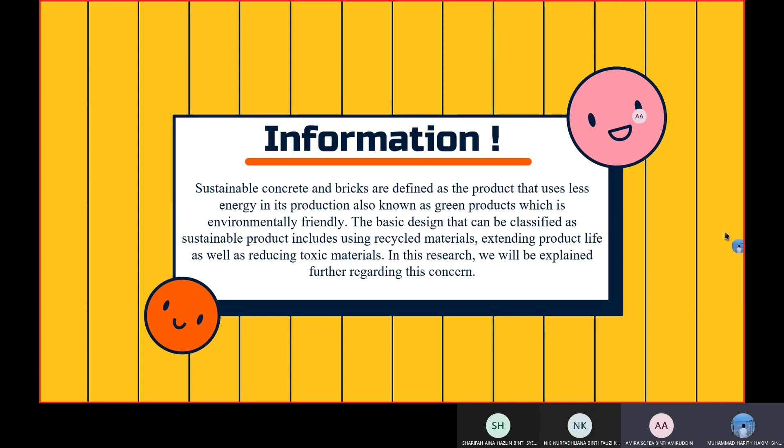The basic design that can be classified as sustainable products includes using recycled materials, extending product life, as well as reducing toxic materials. In this research, we will explain further regarding this concern.

In the journal Concrete Durable but also Sustainable by Professor Dr. Ir. Charles F. Hendriks, the topic being questioned by him is the sustainability of durable concrete from recycled aggregates. He mentioned that even though the process of concrete leads to unlimited quality of sustainability, it could just be a presumption. The goal of this study is that important aspects such as environmental loading and health aspect should be taken for a closer look.

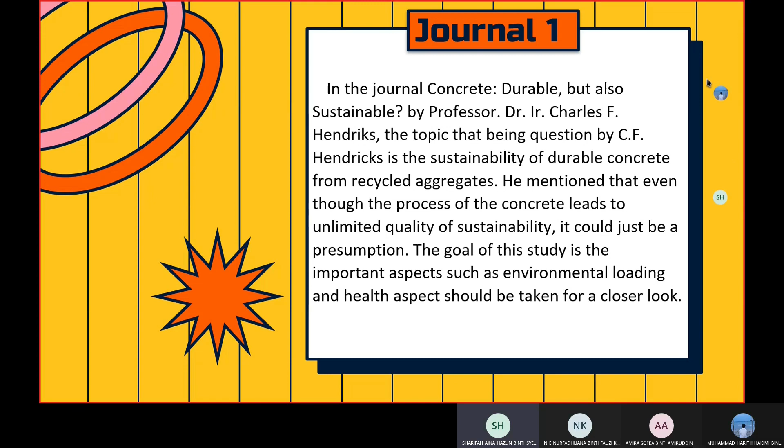Second, the experiment from the journal Properties of concrete with recycled aggregates, influence of properties of the aggregates and their interpretation by M Barra was carried out to evaluate the physical and mechanical characteristics of coarse recycled aggregate created from actual conventional concrete. The paste-coarse recycled aggregate interphase was analyzed with an impact on the characteristic of fresh concrete. The impact of various brick content was also investigated in the recycled concrete.

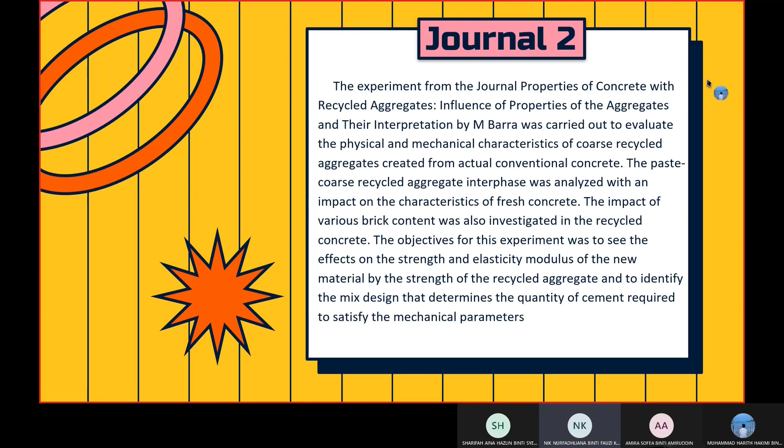The objective for the experiment was to see the effect on the strength and elasticity modulus of the new material by the strength of the recycled aggregate and to identify the mix design that determined the quantity of cement required to satisfy the mechanical parameters.

The third article is in regards of concrete with recycled concrete aggregate that was conducted by R. Dillman from University of Essen, Germany. The tests were carried out to assess the effect of employing recycled aggregates from mature concrete of varying strength on the characteristic of fresh concrete, as well as the effect of adding crushed concrete sand. This written article demonstrated that the strength of mature concrete has no influence on the strength of recycled aggregates or the characteristics of fresh and hardened concrete.

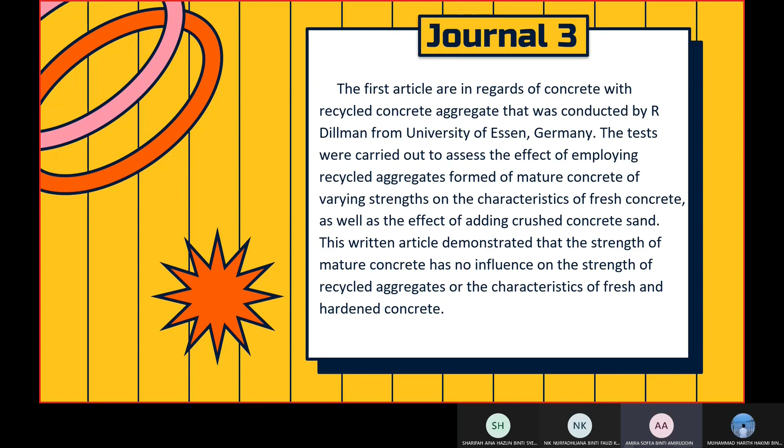So for the fourth journal, in the journal Recycled Concrete Aggregate, an alternative concept by Dr. Adam G. Johnston, Mr. Andrew R. Dawson, and Dr. Gareth J. Brown state that the manufacturing of the aggregate for concrete product is the most effective and environmentally friendly use of the concrete waste. However, there are issues with preserving the consistency and the quality of crushed concrete waste because the crushed concrete waste instead of fresh concrete results in product with reduced strength, slump, and workability.

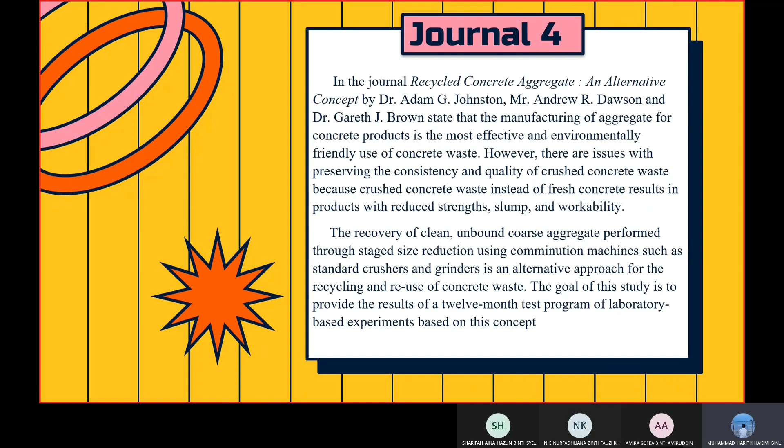The recovery of clean unbound coarse aggregate performed through staged size reduction using comminution machines such as standard crushers and grinders is an alternative approach for the recycling and reuse of concrete waste. The goal of the study is to provide the result of a 12-month test program of laboratory-based experiment based on this concept. So the next segment is the methodology.

The methodology used in this journal is the researcher conducted a research based on the comparison between Dutch CUR organization, RILEM and CEN TC 154 aggregates on the use of recycled aggregates in producing cement. The pros of using this method is, it is much easier for the researcher because it will only involve a lot of reading without having to do a physical research. But the cons is that there will be no test conducted to prove whether the data provided in the earlier research is still eligible to use in the current situation.

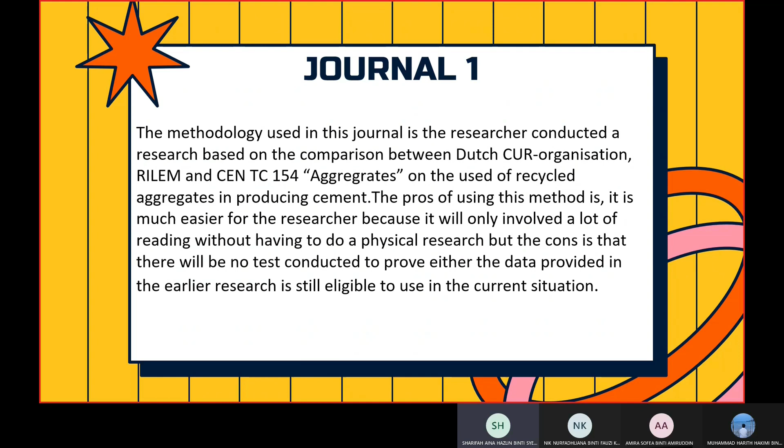Next. The methodology for this journal is the researcher conducted the research based on the influence of recycled aggregates on the properties of new concrete. The coarse aggregate was added to a paste or mortar and then observed, in which the aggregate will be initially mixed with water in certain time.

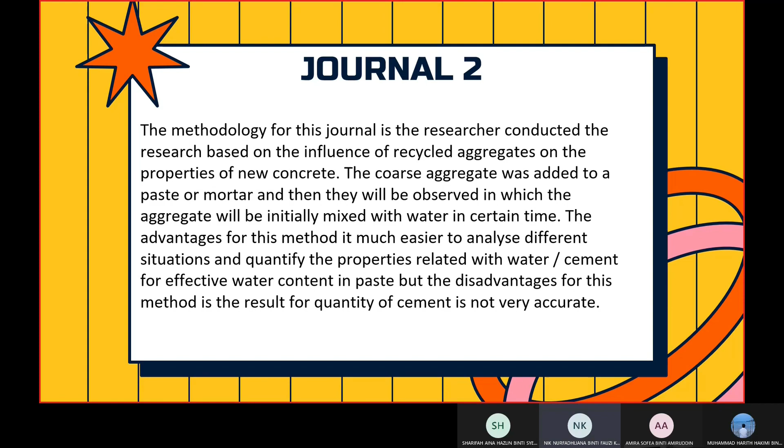The advantage for this method is it is much easier to analyze different situations and quantify the properties related with water, cement for effective water content in paste. But the disadvantage for this method is the result for quantity of cement is not very accurate.

For this purpose, two crushed and sieved aggregates made of concretes with a compressive strength in the lower 20 Newton per millimeter squared and upper 55 Newton per millimeter squared ranges were used, as well as crushed and sieved aggregate, which will be referred to as the practice mix. The practice mix was taken from the concrete stockpile of a recycling site. Firstly, the aggregates tests were done to ascertain the characteristics of the three aggregates supplied.

Next, concretes were made. In an oven, the aggregates were dried. The recycled aggregates were pre-mixed 30 minutes before the concrete production based on the quantity of water absorbed in 30 minutes and the amount of individual grading, so that the recycled aggregates were saturated on the surface yet dry. Following that, 110 dm cubed batches of concrete were made. Following the addition of water, the concrete mixed for 60 seconds and the consistency was assessed.

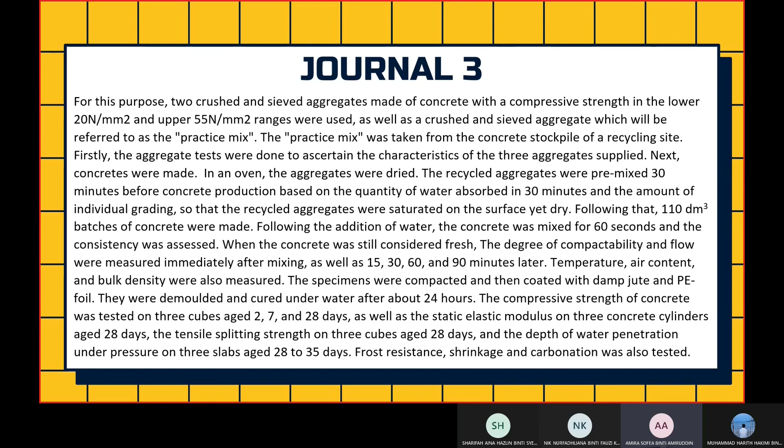The compressive strength of concrete was tested on 3 cubes aged 2, 7, and 28 days, as well as the static elastic modulus on 3 concrete cylinders aged 28 days, the tensile splitting strength on 3 cubes aged 28 days, and the depth of water penetration under pressure on 3 slabs aged 28 to 35 days. Frost resistance, shrinkage, and carbonation were also tested.

So in the fourth journal, the assessment and observation of the volume and rate of aggregate released by traditional crushing and dry grinding were part of the investigation into the aggregate liberation process. Complete specimens were crushed in a double toggle Sturtevant jaw crusher and a Sturtevant smooth rolls crusher as a part of the crushing experiment. The liberated aggregate in each size fraction was weighed to determine the particle size distribution of the crushed product using round-aperture test sieves. Visual classification and hand sorting were used to determine the amount of released aggregate.

All crushed product size fractions bigger than 6.7 mm were recombined in the dry milling trials, and a representative sample was placed in a rotating mill under settings that promote abrasion of the sand binder component from the aggregate particles. The liberation characteristics were determined in the way stated above.

Based on the current differences in the mill operating factors such as charge weight, mill speed, and residence duration, the need for dry product for the preparation of specimens for the binder rehydration investigation is to restrict the use of the wet milling method. The pro of the method is the concrete aggregate will achieve its pure composition in order to ensure the highest quality.

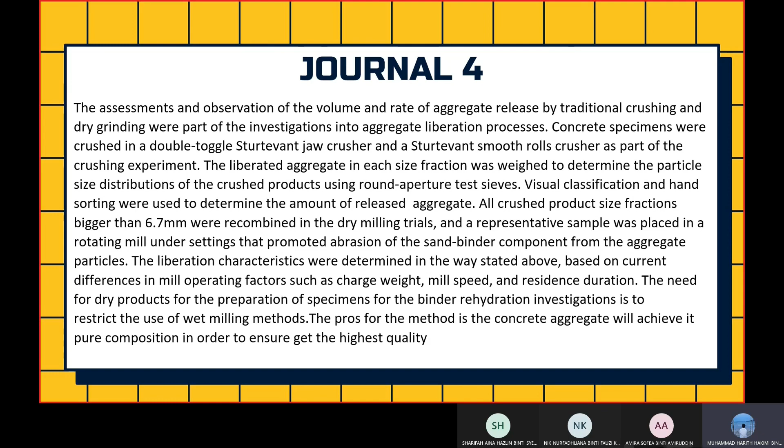So the next segment is the findings. The first finding from this journal is the type of recycled aggregates, which is one of the most important criteria on recycled aggregates. There are 3 important types, which are known as Type 1, Type 2, and Type 3. Type 1 originates primarily from masonry rubble. Type 2 originates from concrete rubble. Meanwhile, Type 3 consists of a blend of maximum 20% of recycled aggregates and minimum 80% of natural aggregates. The requirements for each type are summarized in Table 1.

From this table, we can clearly see that the requirement is totally different for recycled aggregates to be classified according to its type. For example, the table shows that the minimum requirement for dry particle density for Type 1 is only 1500 kg per meter cube, but 2000 kg per meter cube and 2400 kg per meter cube for Type 2 and Type 3 respectively. The maximum content for Type 1 aggregates is intended to be 10%, but an example of 50% masonry and 50% concrete mixture may be used for blending natural aggregate. These categories may equate to an increased level of performance.

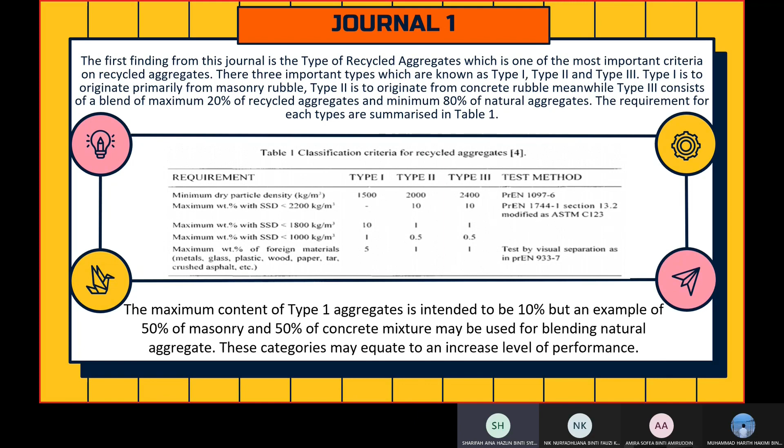The properties of concrete with recycled aggregates may differ from concrete with only natural aggregates. RILEM had concluded the property variations within concrete with up to 20% of recycled aggregates or up to 10% of recycled masonry aggregates are negligible. The second finding will be the properties of concrete with recycled aggregates based on the data provided by the Dutch CUR organization, RILEM and CEN TC 154 aggregates. The first property is water demand.

Recycled concrete aggregates, notably recycled masonry aggregate, typically have a higher porosity than natural aggregates. Because of this, concrete with recycled aggregates absorbs a higher amount of moisture than ordinary concrete. However, by pre-wetting the aggregate or by partly saturating the aggregate in the concrete mixture prior to the addition of cement, a concrete will result with properties similar to those of an ordinary concrete mix.

The next property is workability. A high level of aggregate replacement causes less workability. Adding water may increase the workability, but it is strictly advised against because of the adverse influence on the strength and durability of concrete. Basically, addition of superplasticizer will be more sufficient. Alternatively, the amount of water and cement can also be increased simultaneously in order to keep the water-cement ratio at a constant value.

The third property is shrinkage, creep, and modulus of elasticity. Due to the moisture absorption in recycled masonry aggregates, it may display lower shrinkage in the initial stages of hydration. In case of total replacement with recycled masonry, shrinkage may be about 40% higher, which will increase the creep by 15 to 40% and decrease the modulus of elasticity by 10 to 30%.

The next property is compressive and tensile strength. A full replacement lowers the compressive strength by 20%, but if the fraction is larger than 4 mm, the decrease may be limited to only 10%. The tensile strength is marginally less compared to concrete with natural aggregates. However, recycled masonry causes the bending tensile strength to be about 50 to 60% of ordinary concrete.

Next, frost resistance. If there is no extremely high moisture load, concrete with recycled aggregates can be taken as frost-proof. In case of high moisture load, the application of recycled masonry should be avoided for outdoor application. Water and chloride that can penetrate deeper in concrete with such aggregates can cause frost damage.

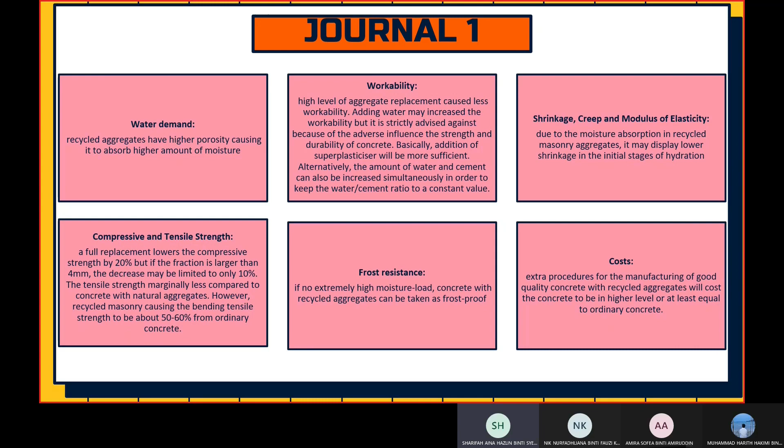And the last property discussed is the cost. The extra procedure for manufacturing good quality concrete with recycled aggregates will cause the cost to be higher or at least equal to ordinary concrete. The third finding for this journal is whether recycling is possible at material level or construction element level. It is explained that the possibilities for recycling aggregates are considered at material level.

In the life cycle assessment, concrete with recycled concrete aggregates consumes higher energy for manufacturing, especially for the crushing and the additional cleaning operation. In case of a higher percentage of recycled aggregates, the cement requirement will increase to compensate for the potential loss of strength. More water or additives should be added, coinciding with the increase of the raw materials.

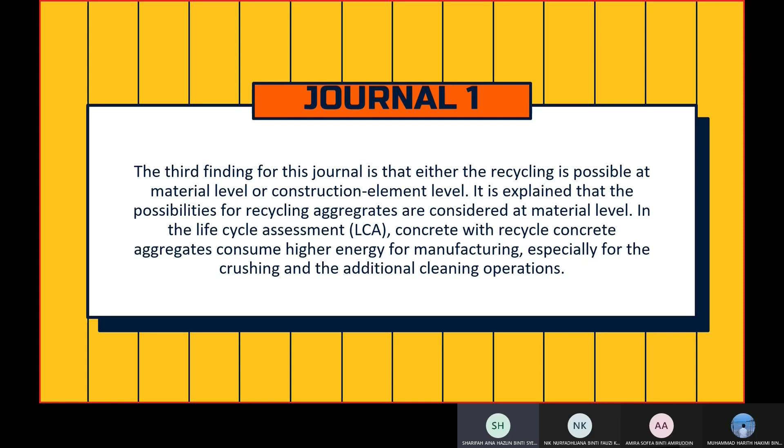In the production of recycled aggregates, there is a larger waste residue than natural aggregates. The environmental advantage of the recycling process at material level is only limited to the landscape deterioration and prevention of landfilling demolition waste.

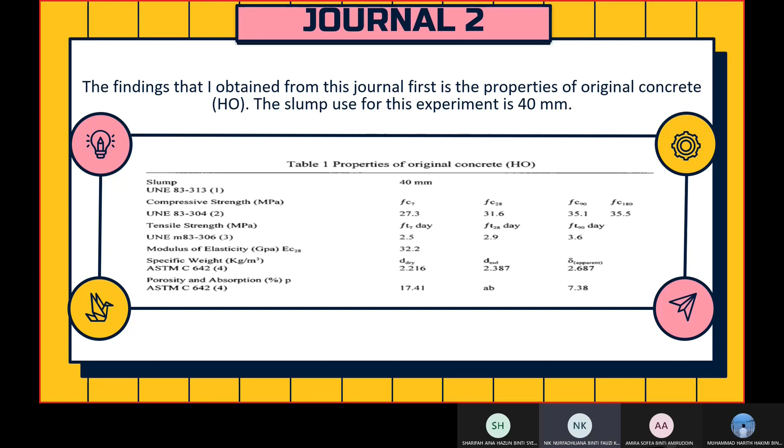For journal 2, the first finding that I obtained from this journal is the properties of original concrete, HO. The slump used for this experiment is 40 mm. This table shows the comparison of recycled concrete aggregates to standard aggregates. The researchers discovered no significant change between them, with the exception of the porosity characteristic. The amount of water that the aggregate will absorb in the mixture is determined by the porosity of the recycled aggregates and the water content in the mixture.

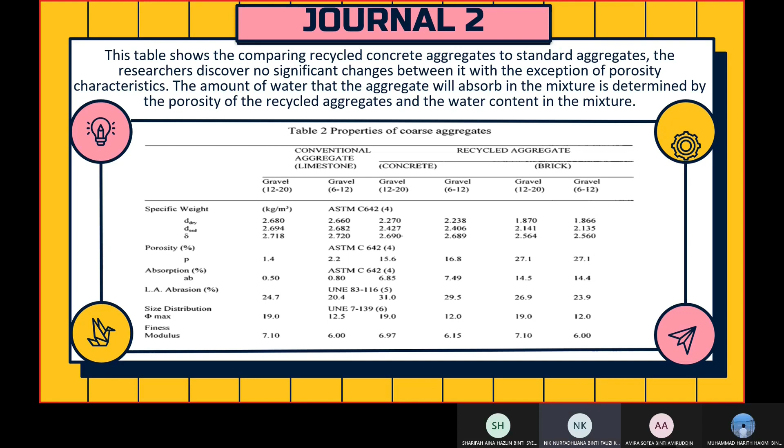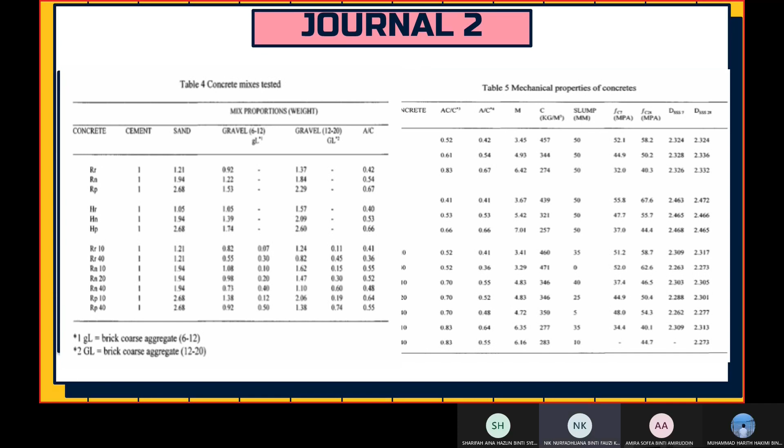The compressive strength is calculated using 10 cm cube specimens according to BS 1881.1169. According to UNE 8301, the modulus of elasticity is measured in cylindrical specimens 15 cm by 30 cm. The density and porosity were determined on prismatic specimens of 7.6 by 7.6 by 25.4 cm.

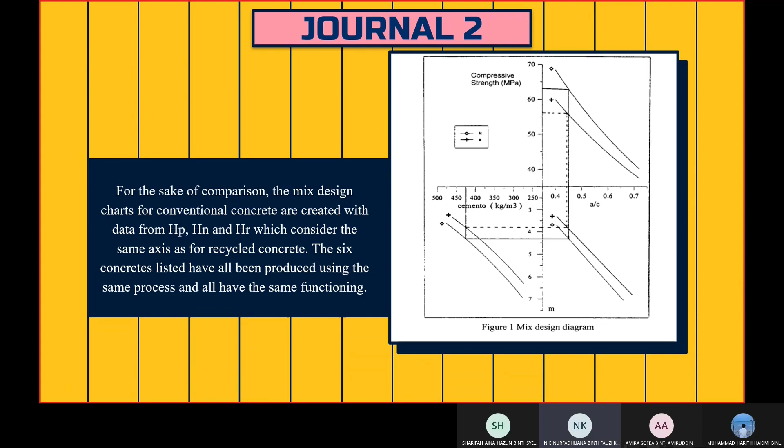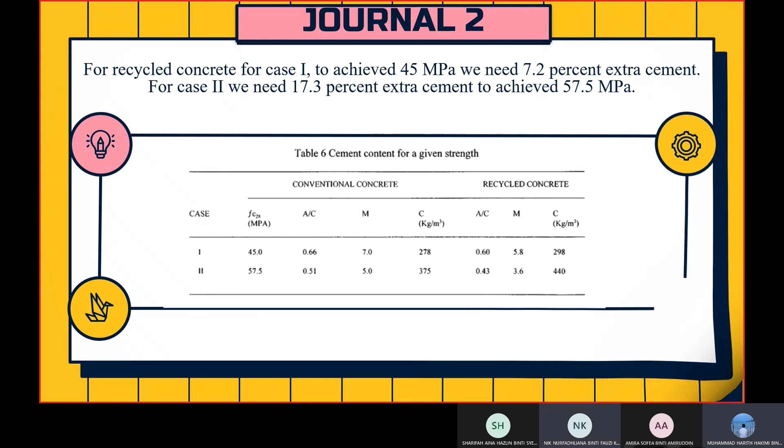Table 6 is the cement content for a given strength. For recycled concrete, for case 1, to achieve 45 MPa, we need 7.2% extra cement. For case 2, we need 17.3% extra cement to achieve 57.5 MPa. Now, for the findings of the third journal, first is the aggregate test.

The percentage of asphalt granulate in the practice mix far exceeded the threshold value. Second, far too high a percentage of asphalt granulate was contained in the aggregate made of recycled concrete. Third, the frost resistance of recycled aggregates did not, with one exception, meet the requirements. And lastly, the settleable matter did not meet the requirements.

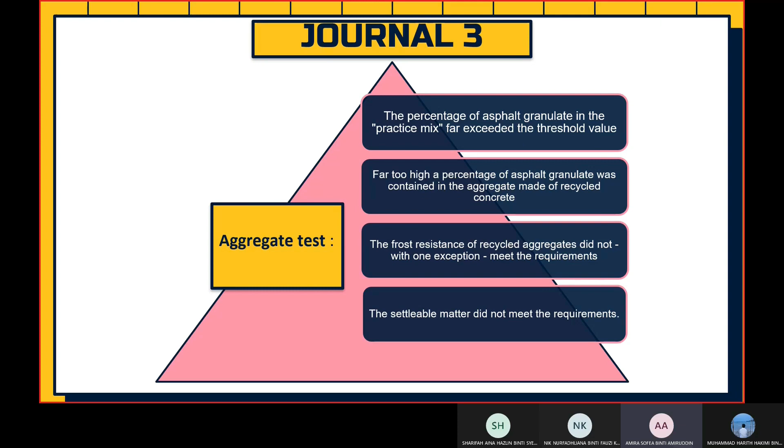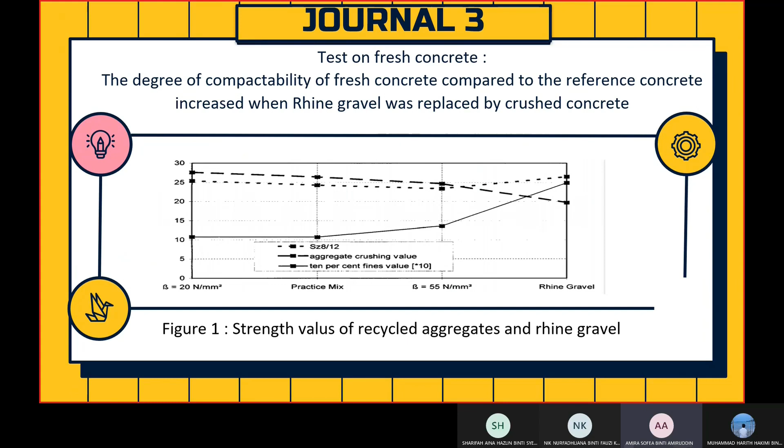Next, for the test on fresh concrete, the degree of compactibility of fresh concrete compared to the reference concrete increased when Rhine gravel was replaced by crushed concrete. Figure 1 explains the strength values of recycled aggregates and Rhine gravel. Next, the test on hardened concrete. From Table 1, you can see the strength values of hardened concrete M1. And Table 2 is the strength values of hardened concrete M2.

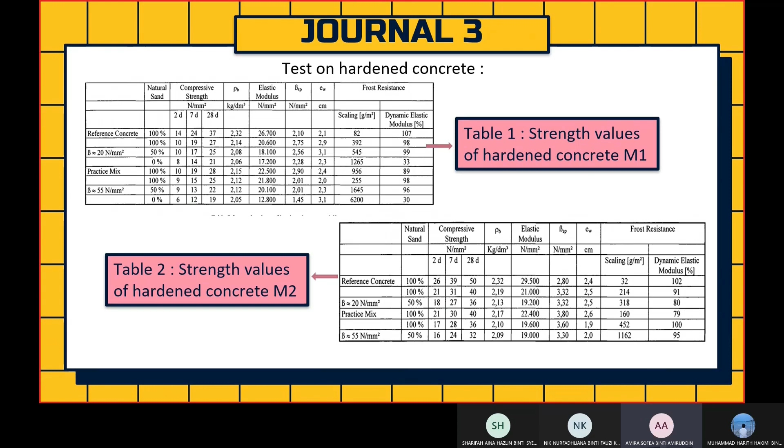Now, from Figure 2, you can see the density of hardened concrete in relation to compressive strength, and Figure 3 explains the elastic moduli in relation to compressive strength. Figure 2 and Figure 3 show that there is a linear relationship between the density of hardened concrete and its compressive strength, as well as between its compressive strength and elastic modulus. Reduced compressive strength and elastic modulus can thus be attributed to the aggregate's lower bulk density and strength.

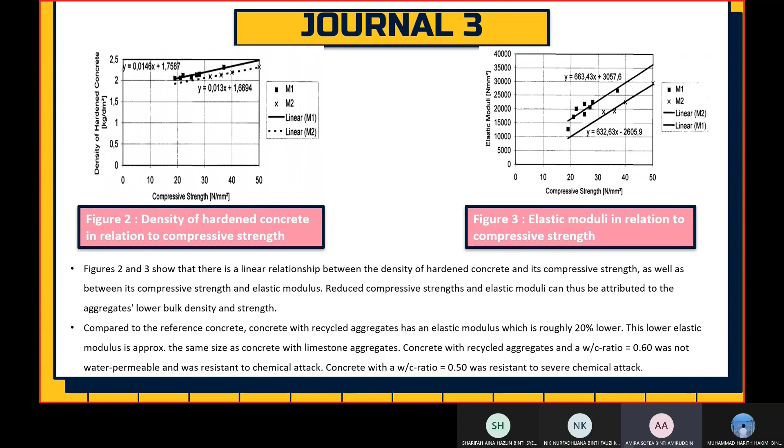Compared to the reference concrete, concrete with recycled aggregates has an elastic modulus which is roughly 20% lower. This lower elastic modulus is approximately the same as concrete with limestone aggregates. Concrete with recycled aggregates and a water-cement ratio of 0.6 was not water permeable and was resistant to chemical attack. Concrete with the water-cement ratio of 0.5 was resistant to severe chemical attack. On the whole, the tensile splitting strength of concrete with recycled aggregates is much higher than that of the reference concrete.

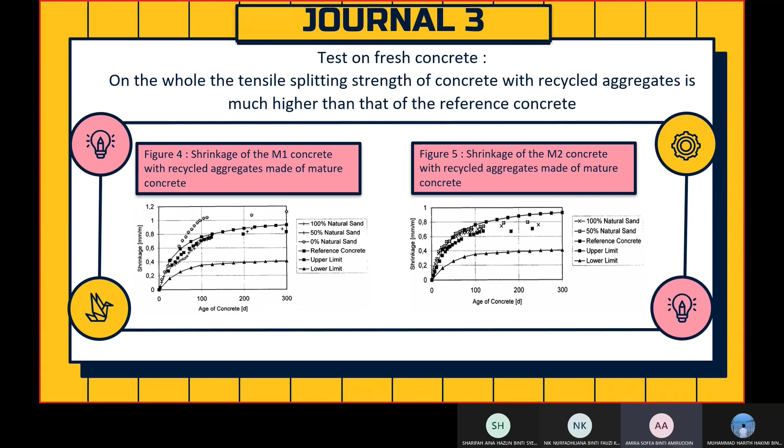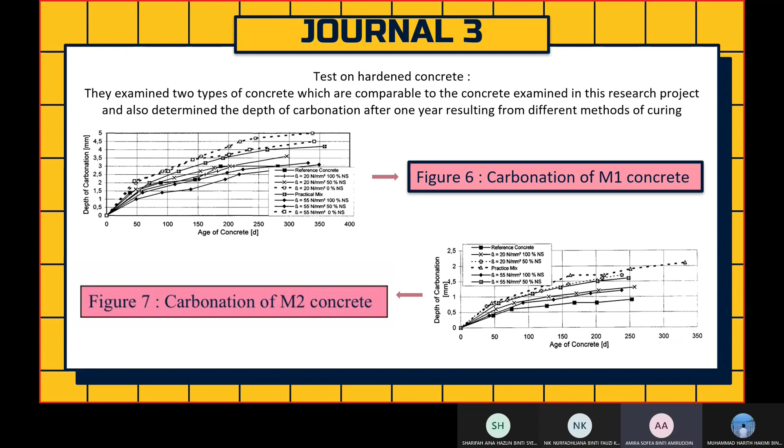As you can see below, Figure 4 explains the shrinkage of the M1 concrete with recycled aggregates made of mature concrete, and Figure 5 interprets the shrinkage of M2 concrete with recycled aggregates made of mature concrete. We examine 2 types of concrete which are comparable to the concrete examined in this research project, and also determine the depth of carbonation after 1 year resulting from different methods of curing. Figure 6 explains the carbonation of M1 concrete, and Figure 7 the carbonation of M2 concrete. The depth of carbonation of all tested concretes with recycled aggregates is within the normal range.

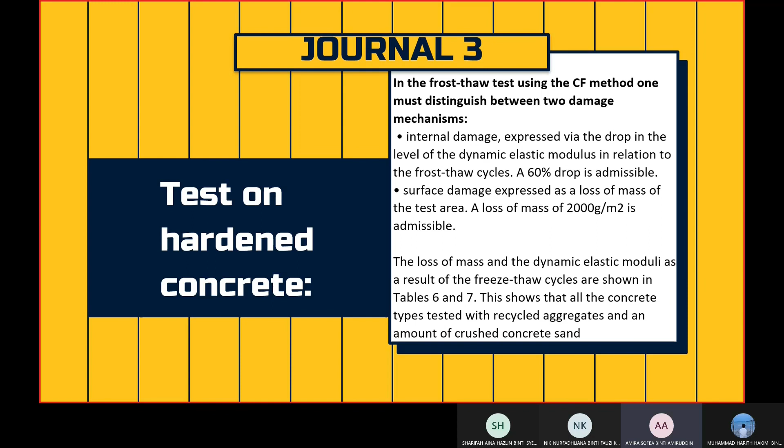Lastly, in the frost thaw test, using the CF method, one must distinguish between 2 damage mechanisms. First is the internal damage expressed via the drop in the level of the dynamic elastic modulus in relation to the frost thaw cycles. A 60% drop is admissible. Next is the surface damage expressed as a loss of mass of the test area. The loss of mass and the dynamic elastic moduli as a result of the freeze thaw cycles are shown in Table 6 and 7. This shows that all the concrete types tested with recycled aggregates and an amount of crushed concrete sand.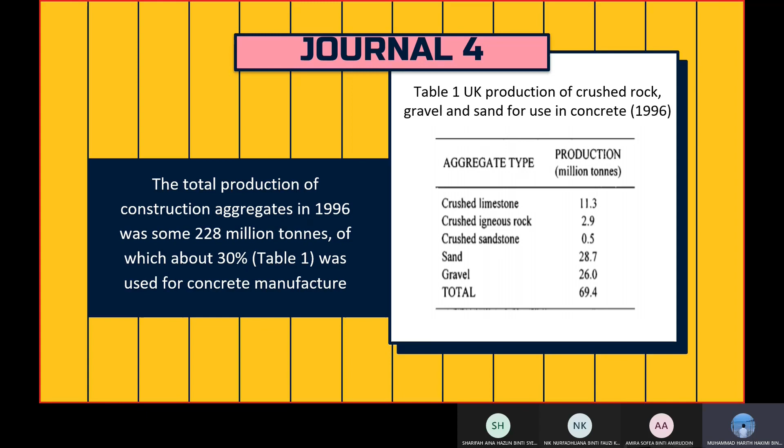Okay, so for Journal 4, as you can see here, Table 1 is the total production of construction aggregates in 1996, some 228 million tons, of which about 30% was used for concrete manufacture. Table 2 showed that the concrete specimens with predetermined mix proportions were cast in 150 mm cubes and allowed to cure at a constant temperature of 28 Celsius for a period of 28 days. So as you can see here, Table 2 showed the concrete specimen data for all the aggregates.

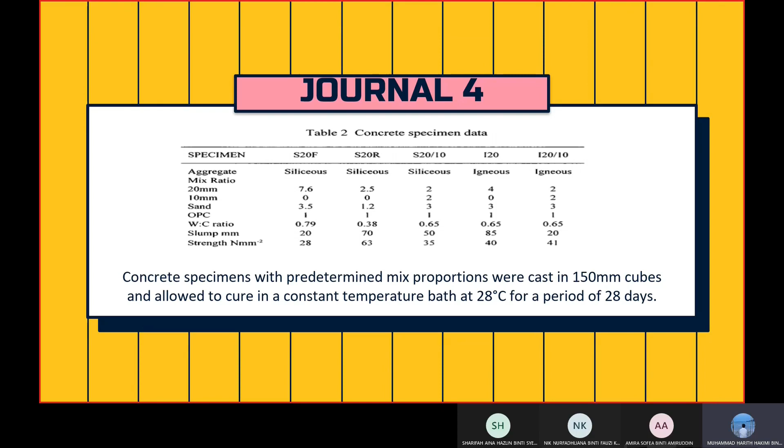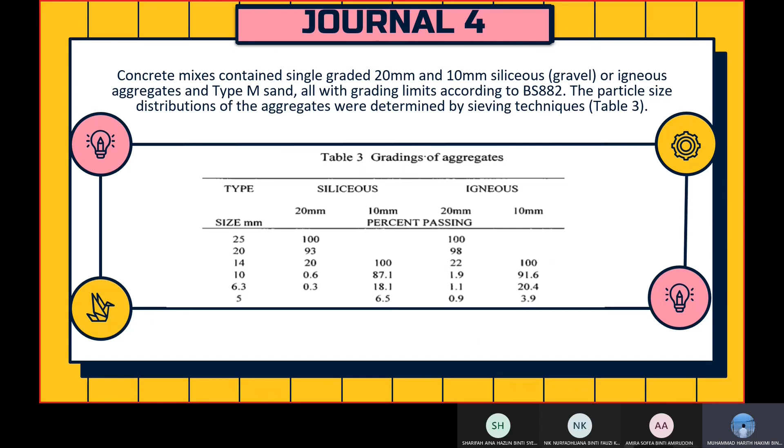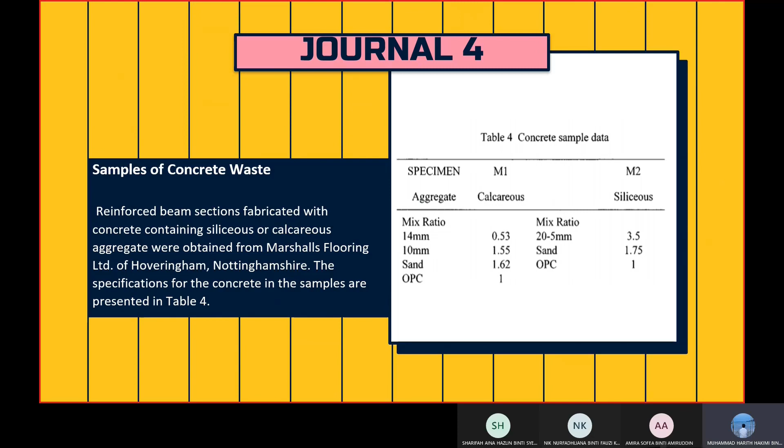So in the next Table 3, the concrete mix contains single graded 20 mm and 10 mm siliceous gravel and igneous aggregate and type M sand. All grading was within grading limits according to BS 882; the particle size distribution of the aggregates was determined by sieving techniques, as you can see in Table 3. So Table 4 shows the samples of concrete waste used in the experiment. We used reinforced beam sections fabricated with concrete containing siliceous and calcareous aggregate obtained from Marshalls Flooring Ltd of Hoveringham, Nottinghamshire. The specifications for the concrete in the samples are presented in Table 4.

So the next one is clean aggregate released by crushing. There are 4 types of product that were classified. The first is aggregate particles free of binder and sand. The second one is aggregate particles with binder and sand attached to their surface. The third one is aggregations of binder and sand. And the fourth one is fines material with size smaller than 3.35 mm.

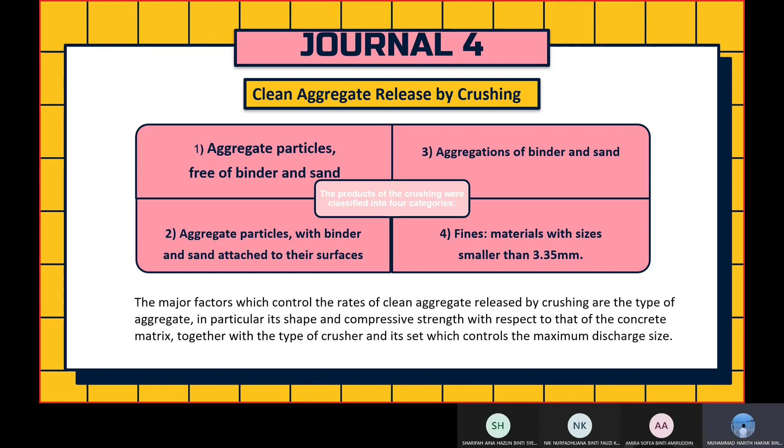As seen in figure 1, the proportion of clean aggregate in the size range of product from all the roll crushing stages were higher than the jaw crusher, as the total mass of aggregate in the concrete specimen was known. Assuming uniform dispersion of the aggregate, it was possible to estimate the proportion of clean aggregate which were liberated.

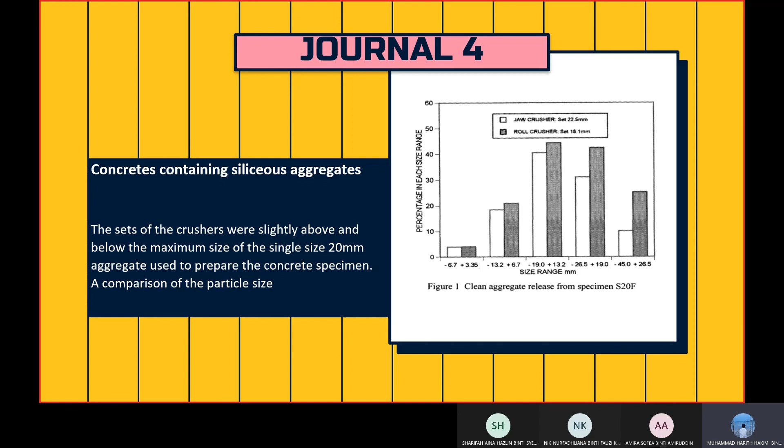In figure 1, the set of the crusher was slightly above and below the maximum size of the single size 20mm aggregate used to prepare the concrete specimen, giving a comparison of particle size.

Visual inspection of the released aggregate indicated that little fracturing of the released aggregate had occurred during the crushing process. Further experimentation demonstrated reduction of the crusher set significantly below the maximum size of the aggregate. Table 5 shows the liberation of clean aggregate by crushing.

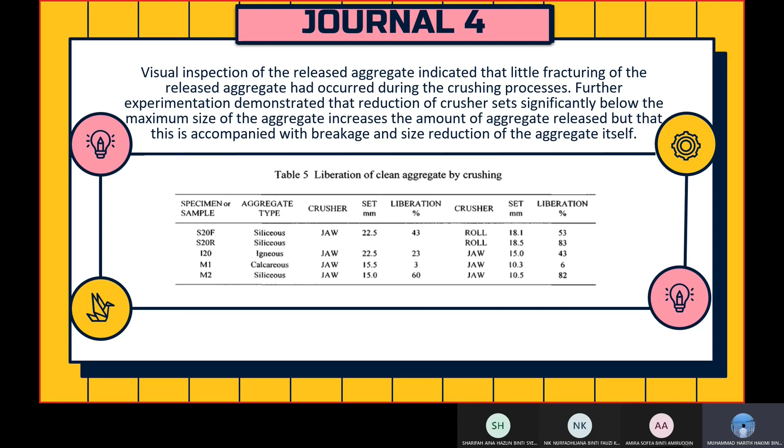For concrete containing calcareous aggregate, the investigation indicated that liberation through crushing was not an effective method of reclaiming clean calcareous aggregate from concrete waste. Jaw crushing of concrete waste sample M1 at sets of 15.5mm and 10.3mm resulted in liberation values of only 3 and 6% respectively. Dry milling failed to abrade the sand binder component from this aggregate.

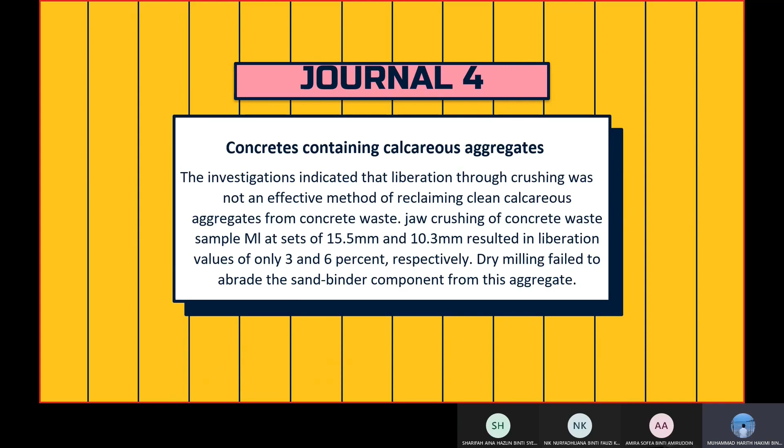For concrete containing igneous aggregate, liberation values obtained by crushing appear to be inferior to those for concrete containing siliceous aggregate. These lower values are illustrated in figure 2.

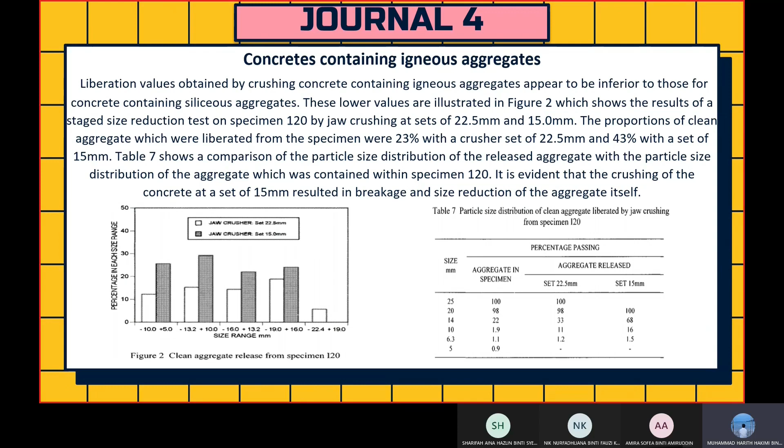Table 7 shows a comparison of the particle size distribution of the released aggregate with the particle size distribution of the aggregate contained within specimen 120. It is evident that crushing the concrete at a set of 15mm resulted in breakage and size reduction of the aggregate itself.

For concrete containing a mixture of two single size aggregates, the grading curve tends to be bimodal. This is illustrated in figure 3, which compares the grading curves for the single size aggregate in specimens S20 and 120 with those for the experimental mixture of two single size aggregates contained in the specimen.

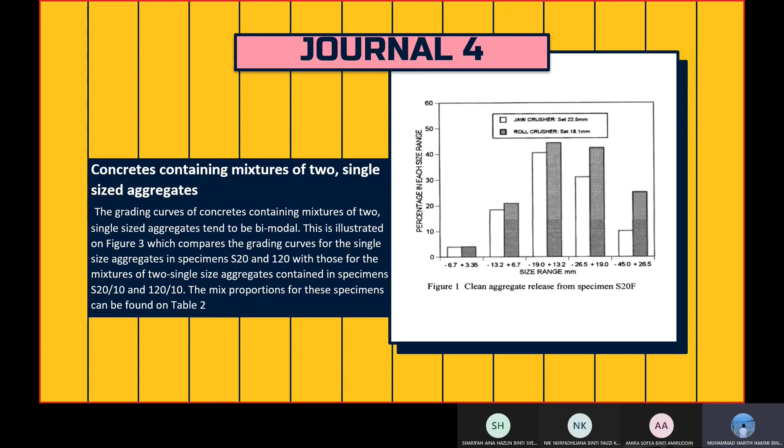The mix proportions for this specimen can be found in table 2. Figure 4 shows the clean aggregate released by jaw crushing from specimen S20,10, and figure 5 shows the clean aggregate released by jaw crushing from specimen 120,10.

Aggregate liberation studies with concrete specimens containing two single size aggregates require size reduction in stages. For specimens S20,10 and 120,10, this involved jaw crushing at a set of 22.4mm and size analysis of the product.

The next stage is combining the size fraction greater than 10mm, and then combining all size fractions greater than 5mm, followed by jaw crushing at a set of 10mm.

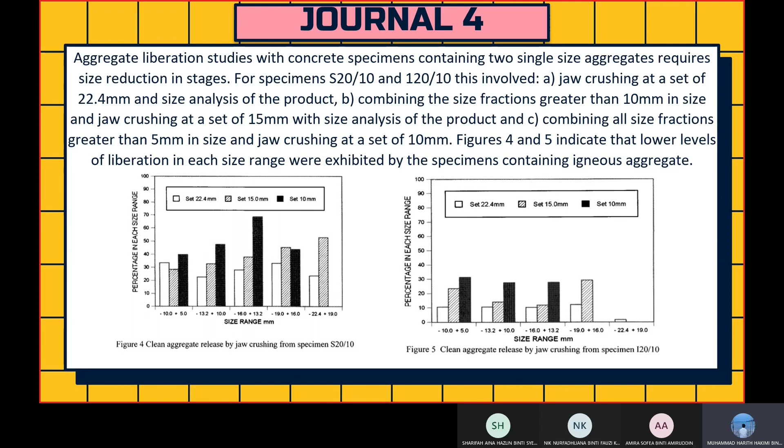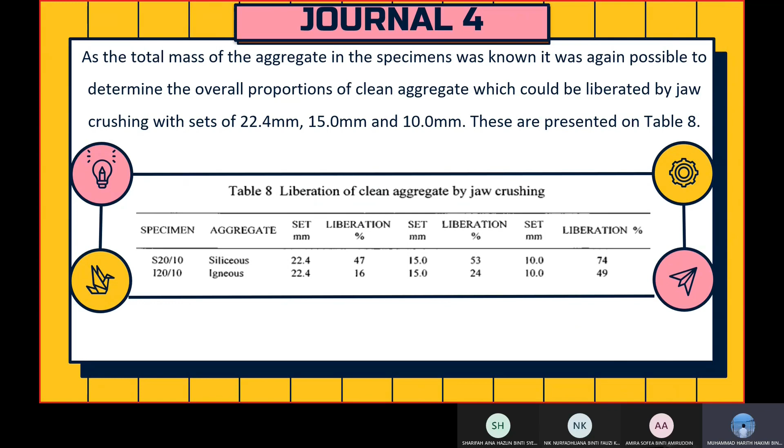Table 8 shows the liberation of clean aggregate by jaw crushing. As the total mass of aggregate in the specimen was known, it was again possible to determine the overall proportion of clean aggregate which could be liberated by jaw crushing with sets of 22.4mm, 15mm, and 10mm. The relationship between crusher set, liberation, and grading of the liberated clean aggregate from the specimen may be seen from tables 9 and 10.

For clean aggregate released by dry milling, the level of liberation of clean siliceous aggregate can be increased without incurring significant aggregate breakage or size reduction by crushing the concrete at a set appropriate to the maximum size of the aggregate, and then milling the crushed product.

The size reduction produced by the milling action was most marked in the fine fraction, but increased the level of release of clean aggregate through abrasion of the binder sand material adhering to particles of aggregate in the larger size fractions. The particle size distribution of the clean released aggregate was similar to that of the aggregate in the concrete specimen, as shown in table 11.

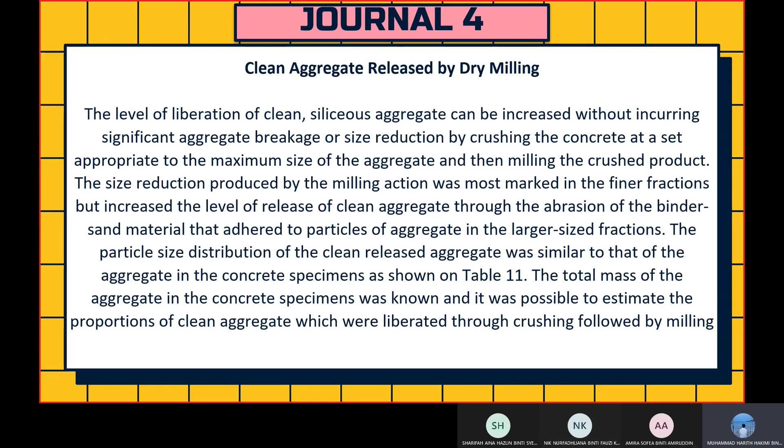As the total mass of aggregate in the concrete specimen was known, it was possible to estimate the proportion of clean aggregate which were liberated through crushing followed by milling.

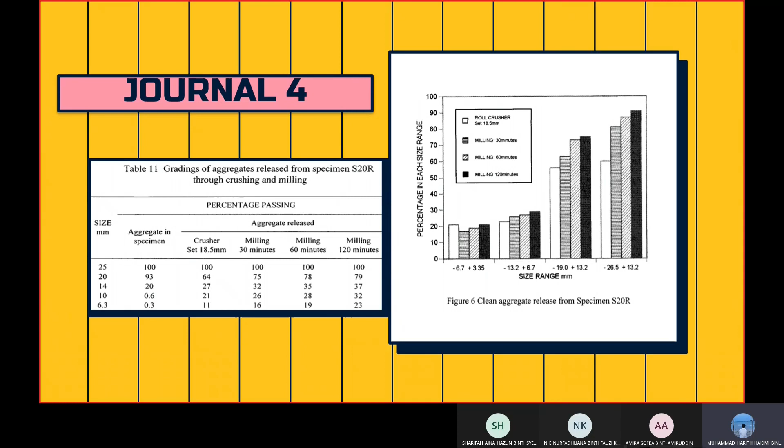So as you can see here, this is Table 11, showing the grading of aggregate released from specimen S20R through crushing and milling. Figure 6 shows the clean aggregate released from specimen S20R. In Table 12, liberation of clean aggregate from specimen S20R.

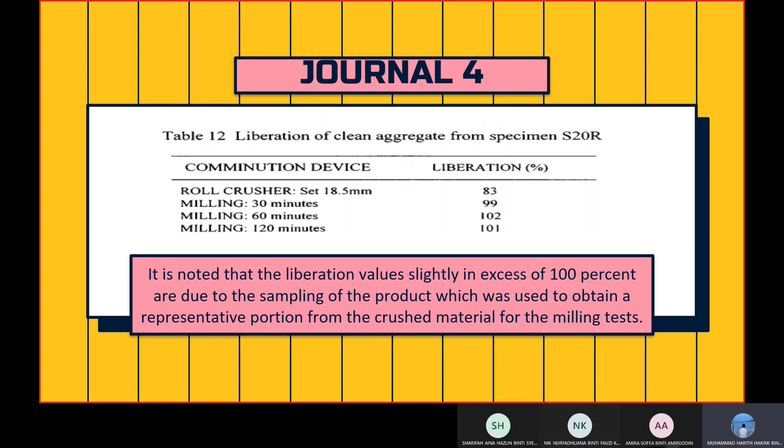The comminution device is a roll crusher set at 18.5mm, and milling times were 30 minutes, 60 minutes, and 120 minutes, so the liberation percentage can be seen in Table 12. It is noted that liberation values slightly in excess of 100% are due to the sampling of the product.

So for the next segment is the discussion.

From the first journal, sustainable construction in concrete is highly desirable for further research in this matter. It also requires the possibility of flexibility and adaptability in construction. In order to reach this level of recycling, a change should take place in conceptual thinking, from waste management during demolition, to chain management during the design stage.

The designer has to deal with design for production, which requires as little waste production as possible during life cycle assessment; design for environment, by using products whose environmental load is as small as possible; design for recycling, in a way that superfluous materials are recyclable to the highest degree; and design for the end-of-life scenario of a building, where appropriate products and optimized connections between those products have to be selected.

Therefore, a balance between environmental profit and life cycle cost, also known as eco-efficiency, has to be found.

Other than that, product reuse requires the product to be as undamaged as possible, which requires a careful way of disassembling. In disassembling, there are three types of connections that must be known: fixed connection, which uses either glue, cement, solder, or clicking, where parts can be damaged by the connection; half-fixed, where the connection may be disconnected but some part will definitely be damaged; and non-fixed, which is easy to disconnect and does not damage the part, so it can be reused.

The quality of a product that has to be reused in another building must have guaranteed quality. Even though the quality may not be as good as a new product, certain specifications still need to be met.

Next, in material recycling, it involves fewer demands in comparison with product reuse. The two connections, fixed and half-fixed, between material may cause pollution of the material and disturb the recycling process. In general, the damage of the product is less important because the materials are being recycled anyway.

Next, the quality of the material is determined by the effect of pollution or by the impact of the aging process. In reusing recycled concrete aggregates for new concrete, it may potentially deteriorate the concrete quality. For example, in steel recycling, it is affected less by the impact of pollution because most of the pollution will be removed in the recycling process adopted, which in this case is the painting of the steel.

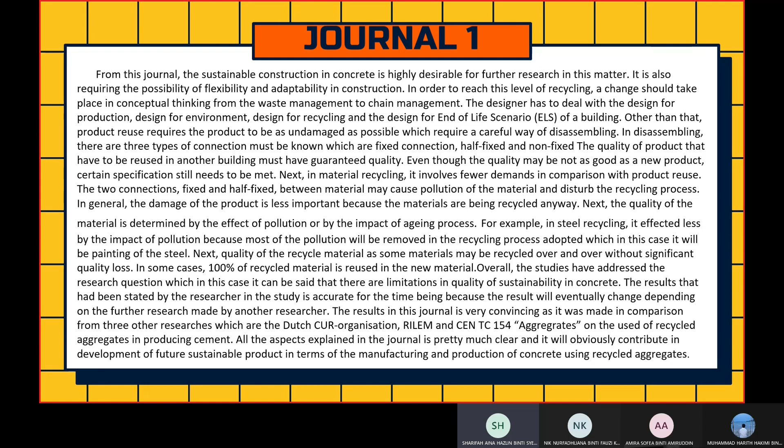The results in this journal are very convincing, as it was made in comparison with three other researchers: the Dutch CUR organization, RILEM, and CEN TC 154 on the use of recycled aggregates in producing cement. All the aspects explained in the journal are pretty much clear, and it will obviously contribute to the development of future sustainable products in terms of manufacturing and production of concrete using recycled aggregates.

Discussion for Journal 2. Due to increased porosity, the mortar of the original concrete causes the water absorption of the recycled aggregate to rise. This increased water absorption creates a large range of change in density compared to traditional aggregate. In concrete manufacturing, density fluctuation leads to variation in the proportion of the mixture, and hence in the characteristics of concrete. An indicator term, the effective absorption coefficient, was created to adjust the manufacturing technique for concrete produced with this aggregate.

This variable refers to the quantity of water absorbed by the added water, and allows water and aggregate to be adjusted in the new concrete mixture.

Most of the recycled aggregates utilized in the concrete and brick studies fulfill all current scrapping criteria and recommendations. Next, the variability of recycled aggregate characteristics requires that a special method of mixing, as applied in this study, take into consideration the effect of the concrete characteristic of the aggregate.

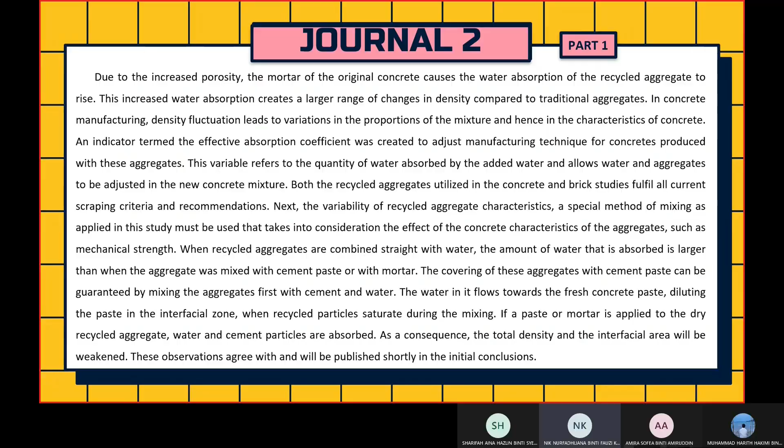Apart from that, concrete using recycled aggregate requires a greater cement concentration for a given force. The cement content increased by 7.2% for 45 MPa concretes, and the cement percentage for 57.5 MPa concrete increased progressively to 17.3% for the production of greater strength in recycled aggregate concrete. This increased the overall interface characteristic and longevity of the system.

Data dispersion of compressive strength data has also been demonstrated to be similar to conventional concrete. Concrete produced with the addition of dry aggregate exhibits less scatter, which indicates that the mixture is homogeneous and higher in quality. This must be checked for various types of cement mix.

Conventional concrete is 10% higher than recycled aggregate concrete in dry and saturated surface dry mass specific gravity. The replacement of recycled concrete by crushed brick reduced the dry and saturated surface dry bulk and appearance because of the more porous, less dense gravity of the crushed bricks.

There is no increase in open porosity despite this decline. This can be explained in reality by a differential in the distribution of porosity. The poring mechanism in broken bricks allows additional absorption of cement paste, which isolates numerous vacuums that would otherwise be linked. Concrete with recycled aggregate has elasticity modulus in line with the equation provided by the Japanese Architectural Institute.

Lastly, the research addressed the study issue, which in this case may be stated that there are limitations with the amount of cement required to meet the mechanical requirement. The finding for the cement content of the provided strength is not accurate. However, the other results above are very convincing. With the use of recycled aggregate, it is possible to obtain concrete with good quality in terms of strength and durability in the future.

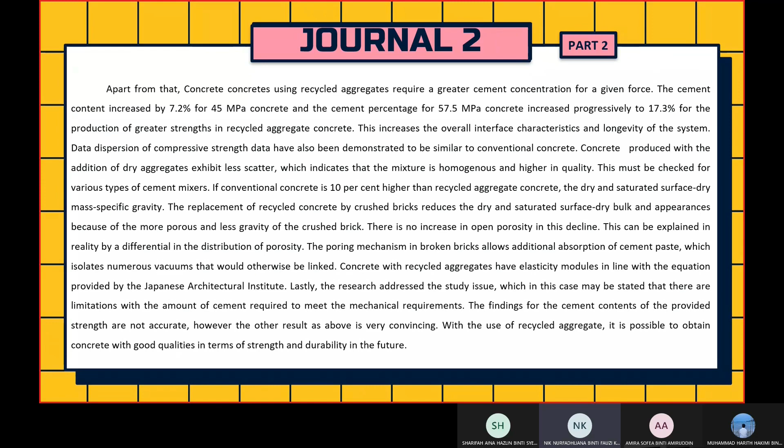Journal 3 discussed that although there were no major limitations, the research made it known that a plasticizer or a super plasticizer can be used to control the consistency of new concrete.

The loss of workability of concrete, including recycled aggregates, is about equivalent to that of the reference concrete. The compressive strength and elastic moduli of recycled aggregate concrete are lower than those of reference concrete. This was ascribed to the aggregate's reduced bulk density and hence their lesser strength.

The elastic moduli of concrete, including recycled aggregates, are substantially lower than those of the reference concrete and are generally comparable to those of concrete using limestone aggregates. The decline in compressive strength and elastic modulus can be minimized by increasing the strength of the cement matrix.

The tensile splitting strength of recycled aggregates concrete was found to be greater than that of the reference concrete. Only when 100% crushed concrete sand was added did the tensile splitting strength decrease.

Concrete with recycled aggregates with a water-cement ratio of 0.6 was water impermeable and resistant to chemical attack. Concrete with a water-cement ratio of 0.5 was resistant to severe chemical attack.

All of the findings and results obtained from the conducted tests are convincing enough, although there are several tests that could vary in accuracy, such as the determination of the depth of carbonation after 1 year, since the results depend on natural environmental experiment. The study contributed to the development of future sustainable products.

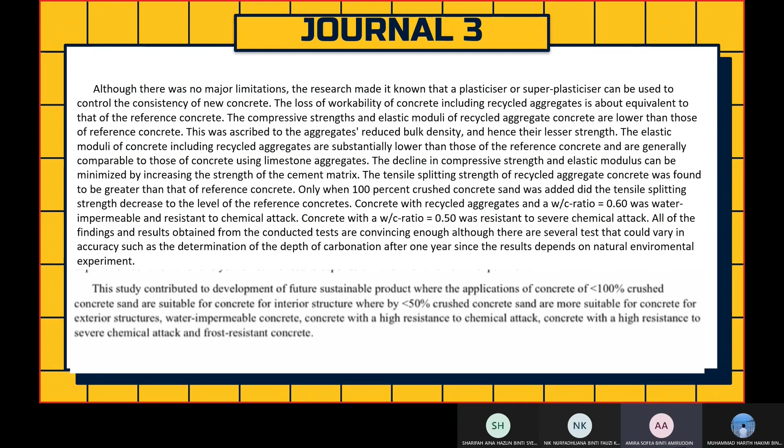With the application of concrete below 100% crushed concrete sand suitable for interior structures, whereby 50% lower crushed concrete sand is more suitable for concrete for exterior structures: water impermeable concrete, concrete with high resistance to chemical attack, concrete with high resistance to severe chemical attack, and frost resistant concrete.

The fourth journal made clear that crushing can liberate clean siliceous or igneous aggregate from concrete waste. According to the results of the pilot study, concrete containing siliceous aggregate appeared to have higher levels of liberation than those containing igneous aggregate. With concrete containing calcareous aggregate, the approach does not appear to be effective. Single-stage crushing liberates clean, unbroken siliceous or igneous material if the crusher set meets the aggregate maximum size.

The level of liberation can be increased by crushing with a set smaller than the aggregate maximum size, although this results in the breakage and size decrease of the liberated aggregate in an industrial setting. Research is also being conducted to identify strategies for separating the liberated clean aggregate from the crushed concrete product.

The milling investigations have shown a potential way of isolating the liberated aggregate. According to the findings, milling liberates all of the siliceous aggregate from concrete waste, and successful separation can be accomplished simply by screening the milled product at the aggregate size. Dry milling was utilized in these studies to yield a fines product whose rehydration strength qualities could be tested. If the rehydration qualities aren't important, wet comminution processes like slurry milling and attrition scrubbing, which are substantially faster, more energy efficient and more cost-effective than dry milling, may be an option.

As for the research, it proved that there are limitations with the quality and strength of the recycled aggregate, but the findings have very convincing results as stated above. The recycled aggregate has future application; this method of research is useful to achieve good quality concrete aggregate from concrete waste. For this reason, the strength and the workability of the concrete aggregate can compete with new material resources.

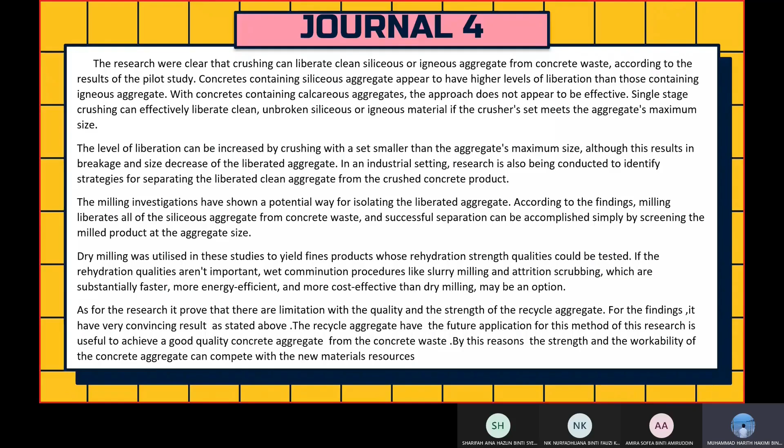So the next segment is the conclusion segment. In terms of the conclusion, the overall goal of the research was reached, which was to develop an effective approach for determining whether recycled concrete waste can be used in future construction projects. Concrete can be used to build a sustainable structure. According to the first journal, concerns about raw material, energy, emissions, waste and inconvenient procedures to reduce the environmental and health load are already in existence. However, by incorporating design for recycling or design for disassembly into the design method, more could be accomplished.

For the second journal, the researchers reported that by lowering the cement percentage to a very low level for minor strength requirements, reinforced concrete with normal strength can be made utilizing recycled aggregate. A mixture of cement-soaked recycled aggregate influences the interface, which improves the interface stability and alkali reservation by adding cement. According to the study, dry recycled aggregate creates a weak interfacial zone due to the absorption of water and cement particles by the aggregate. This stage of production affects the quality of the mortar-recycled aggregate interfacial area, and hence the aggregate longevity. To create a highly resistant interfacial zone and link them, the transit duration of this combination must be managed.

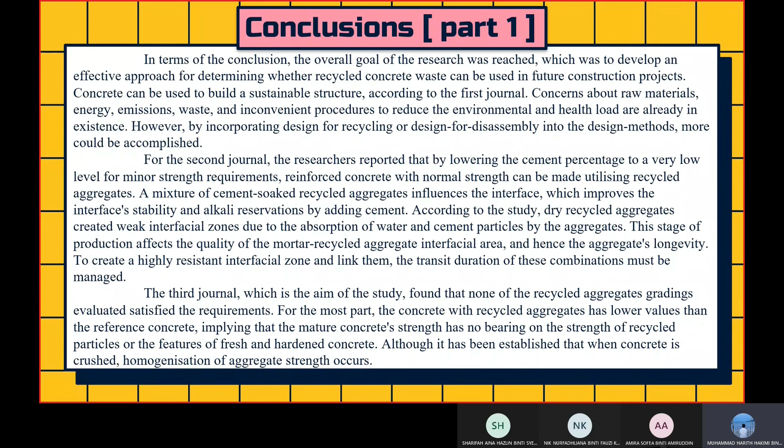And the conclusion for the third journal is that the study found that none of the recycled aggregate gradings evaluated satisfied the requirement. For the most part, the concrete with recycled aggregate has lower values than the reference concrete, implying that the mature concrete strength has no bearing on the strength of recycled particles or the features of fresh and hardened concrete, although it has been established that when concrete is crushed, homogenization of aggregate strength occurs.

In the fourth journal, three potential approaches to the creation of waste concrete recycling system designs were identified. Stage size reduction with crushers and screens is the first option for obtaining partial liberation and separation of clean aggregate. The purpose of dry screening or wet screening and hydrocyclone treatment of crushed fines is to produce products that can be used as sand substitutes. Next, stage size reduction with crushers, followed by dry milling and screening, can achieve 100% liberation and separation of clean aggregate, with reclamation of the milled fines used as a sand substitute or as a self-hardening material.

The last one is stage reduction using crushers followed by slurry milling or attrition scrubbing and screening, which can obtain 100% liberation and separation of clean aggregate. Milled fines are processed by wet screening and hydrocyclone treatment to obtain products suitable as sand substitutes. Even though there are some limits in the research, all of the findings have their own convincing outcomes that indicate the use of recycled waste concrete has a good future application.

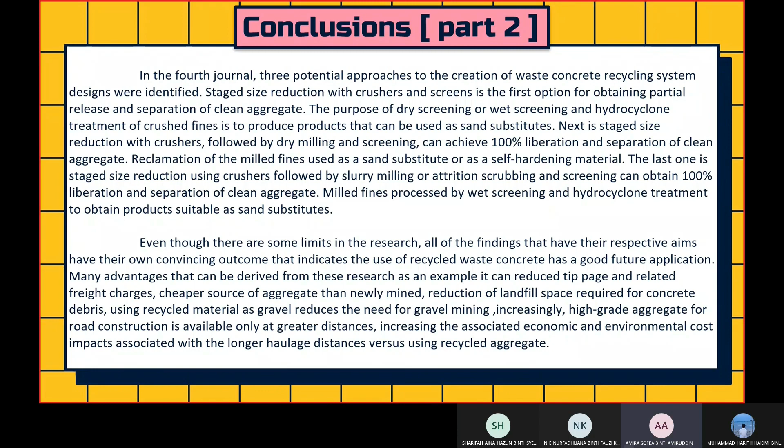Many advantages can be derived from this research. As an example, it can reduce tipping and related freight charges, provide a cheaper source of aggregate than newly mined, reduce the landfill space required for concrete debris, and using recycled material as gravel reduces the need for gravel mining. Increasingly, high-grade aggregate for road construction is available only at greater distances, increasing the associated economic and environmental cost impacts of the longer haulage distance versus using recycled aggregates.